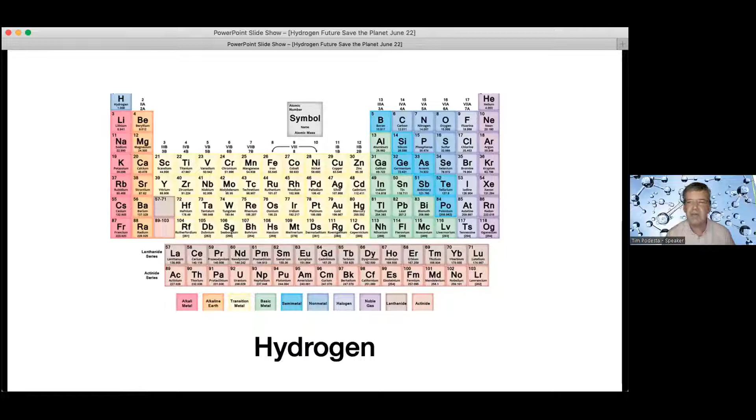Three points I want to leave you with today as things to take away. Hydrogen—it's actually all around us. It's nothing new.

Secondly, we need to get ready for hydrogen because it's coming. We're seeing many pilots of this application or that application, and as a replacement for hydrocarbons, it is certainly a useful tool. When you burn hydrogen or use it in a fuel cell, you produce water, so the carbon dioxide from hydrocarbons is abated, is avoided.

And thirdly, like gas—natural gas or LPG, liquid petroleum gas that we might put in some cars or use for cooking—we just need to take care with it. It can be hazardous, so just like gas, LPG, you need to take care with it.

Hydrogen is all around us. The sun is 70% hydrogen. Most of the rest is helium, and the fusion, the sunlight that we enjoy, the main source of energy for much that happens on the earth, is from the fusion of hydrogen.

Organic compounds—hydrogen is a big part of plants, of humans. I think 10% of the human body is effectively hydrogen, probably as water.

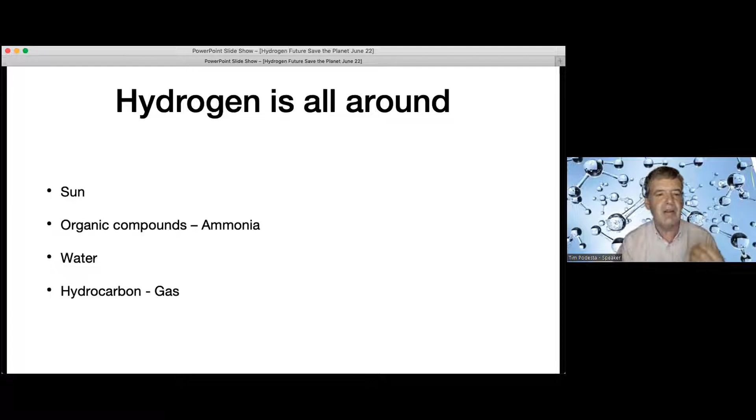The thing about hydrogen—it's very, very reactive, and actually it doesn't naturally occur on its own. It's always attached to nitrogen in the case of ammonia, or oxygen in the case of water, or carbon in the case of hydrocarbon. So to actually have hydrogen to be able to use, there needs to be a process behind it.

A bit more physics on hydrogen. Some people think hydrogen is the new oil. Now, I'm not so sure about that, because if you look at hydrogen and its properties, it's actually not dissimilar to gas, to methane. Compared to methanol and gasoline, which are the more common liquid fuels today, it is quite different in terms of molecular weight.

Some interesting characteristics of hydrogen: its actual density is very, very low—much less dense than even methane. That is an issue if you're looking to use it as a fuel, because to move it or store it, you need to compress it even more than normal gas, normal methane.

One advantage it has is viscosity. Viscosity is useful for products because that's the friction if you're moving products through a pipeline, something I'm very familiar with from my background. But because it's a lot less viscous—10 to the -5 rather than 10 to the -4 for methane—it's actually more easily transportable through pipelines. One of the issues with any fuel is moving it from its source to its consumer.

Boiling point, it's not dissimilar to another difference with methane. Methane has a boiling point of -162. So if you want to liquefy methane, you have to go quite cold. But for hydrogen, you have to go even colder. So if you're transporting hydrogen, you need to liquefy it to even colder temperatures, which can be more costly.

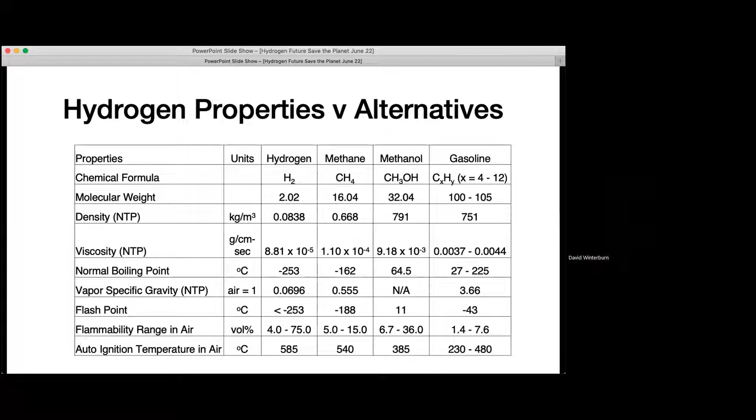If you look at the world of gas today, liquefied natural gas - a big part of the market is transporting LNG around the world in tankers. We're hearing a lot about that at the minute in terms of the global supply of gas, and one of the drivers is the scarcity or the need for LNG to replace gas from other places like Russia.

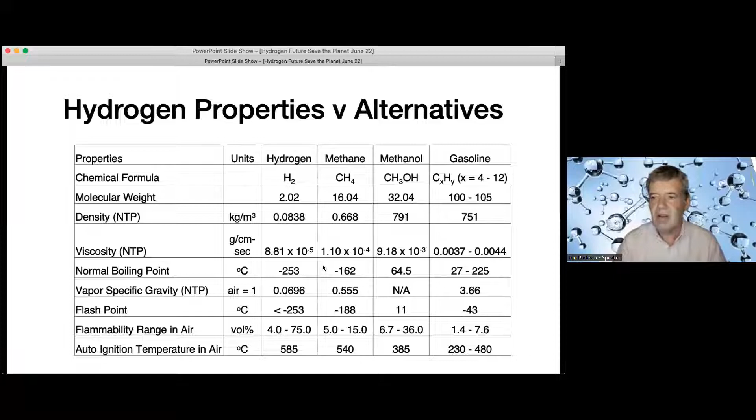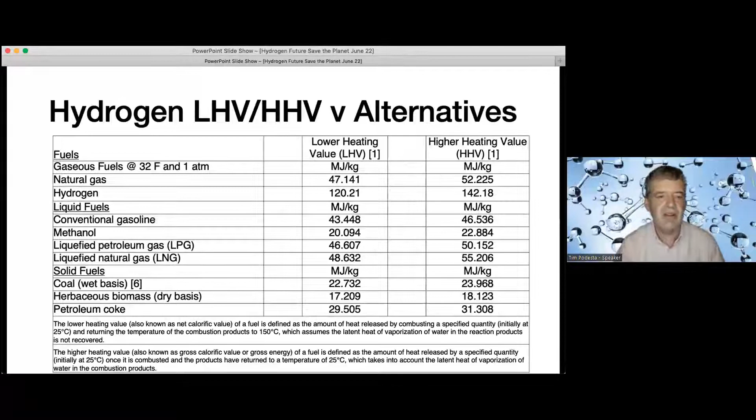So getting ready for hydrogen - this is how it will impact our lives going forward. It's the opportunity that could be part of our supply in the homes. Ultimately, you could have all our gas appliances running off hydrogen. In fact, there are some trials going on about how that might come about.

I want to give you a little background on the UK strategy for hydrogen, which I've done some deep analysis on. The UK has a strategy for developing hydrogen, and also fuel cells, which is the device that will effectively use hydrogen in various applications, particularly transportation, to convert hydrogen to electricity to provide motive power. That's something well advanced, and there are examples of it in practice, which I'll share.

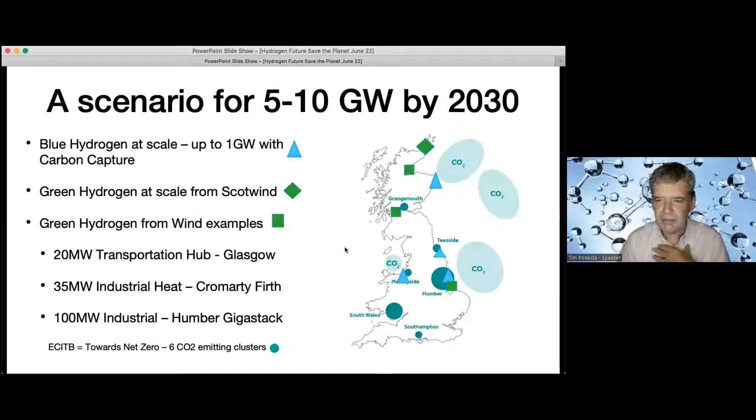So I think I want to move quickly on to talking about cars, and then leave some time for discussion.

In terms of large-scale hydrogen, one of my favorite projects is Shetland, where I did my early engineering training at a place called Sullom Voe. They've got a scheme there to effectively capture electricity or hydrogen, either making hydrogen onshore or even offshore, and finding a way of getting it to a market, probably an export market.

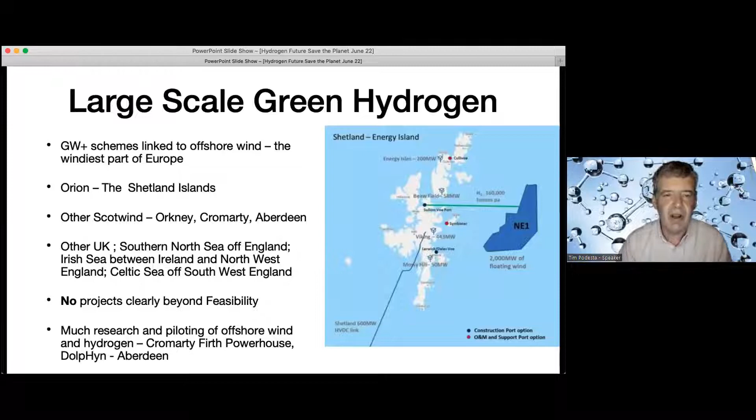Issue with wind power is two things: one is the load factor, and the other is curtailment. There are big wind farms, one of the biggest in Scotland, and as more wind power is put in place, there'll be more curtailment. Curtailment is the act of telling a producer of wind power to stop, because we can't use all the power you're producing. You need to shut it down a bit.

In 2018, I think several tens of millions of pounds were paid to the producer of electricity at this location to stop, to reduce their production of wind power. There's clearly an opportunity to use that power to produce hydrogen, and there is a scheme to produce hydrogen for buses in Glasgow.

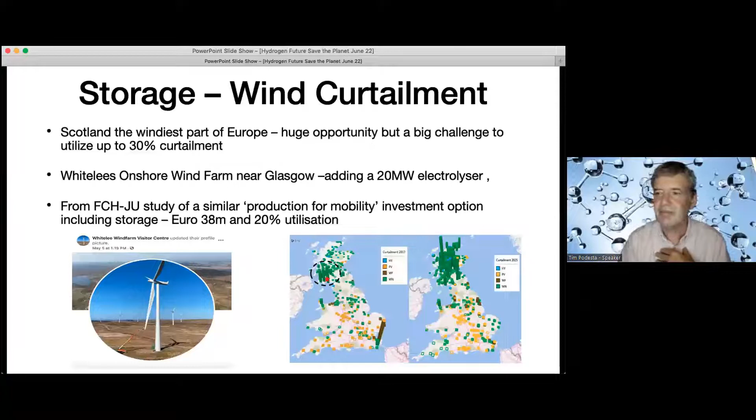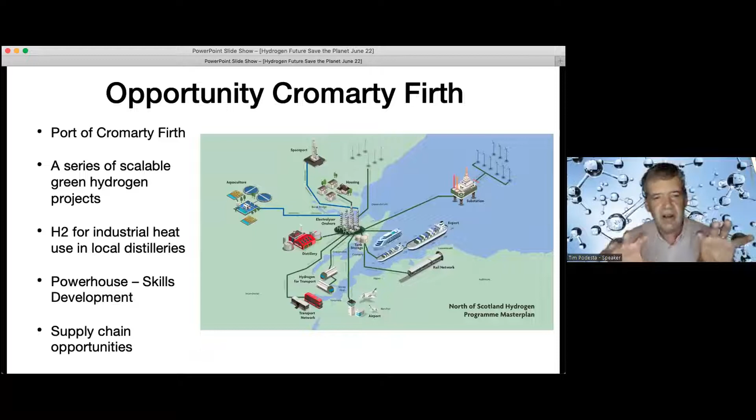Cromarty Firth, as well as this distillery scheme, have a grand plan to develop skills and an industry supporting offshore wind. So there's a strong connection between offshore wind and hydrogen, which will be a big part of the Scottish economy going forward.

Fuel cells - this is where hydrogen becomes useful for transportation. This gentleman is Tom Bacon, who was an engineer in the 50s at Cambridge University, where I studied engineering. Behind him is a fuel cell he developed, which was then licensed by Pratt & Whitney, who applied it to the Apollo program.

Effectively, a fuel cell is the reverse of an electrolyzer - you mix hydrogen and oxygen together and you get electricity and water. This was very useful for astronauts going to the moon, since they had hydrogen as fuel and oxygen as part of the payload. In the fuel cells, they generated electricity for life support, but they also produced water, and an element of air conditioning, because some heat is emitted as part of the process.

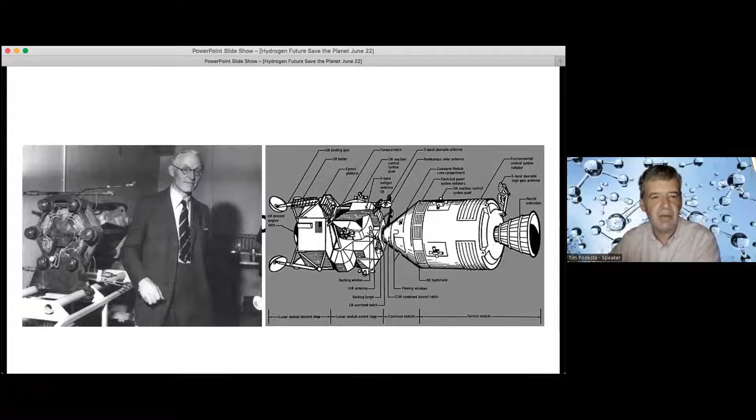What that means is that it's not new, but its application is quite new in these different areas, from buses to trucks to trains to planes and automobiles, question mark. Hydrogen has an advantage for heavy duty use - long distances, long duty time. You want your transport vehicle to be operating most of the day, day after day, and if you've got a heavy load, you need the ability to generate power.

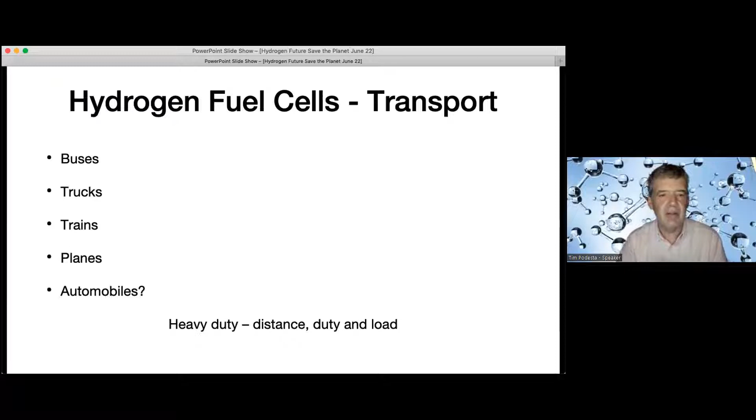Buses is one good example. At Glasgow's COP26, there was a lot of interest in projects around Glasgow going green. Glasgow's bus fleet is about 800 buses, and they have an aim to develop at least 100 hydrogen buses, 50 initially, to cover the route from Edinburgh to Glasgow. That's a long distance route, with buses running most of the day.

The rule of thumb is that one hydrogen bus is equivalent to a diesel bus, but if you have an electric bus, you need two electric buses to do the same duty as a diesel bus, because of issues of load and duration - they need to recharge.

I did get to visit a bus filling station in Barcelona. These things do exist, and I think it's a sign of how hydrogen business opportunities are developing. A lot of money has been put into developing this fueling station by an organization called Iberdrola, who actually own Scottish Power - so they are a big organization. It's organizations with that financial strength and reputational ambition that are making these investments, and this is not a cheap site - some of the facilities are actually quite impressive in terms of engineering design.

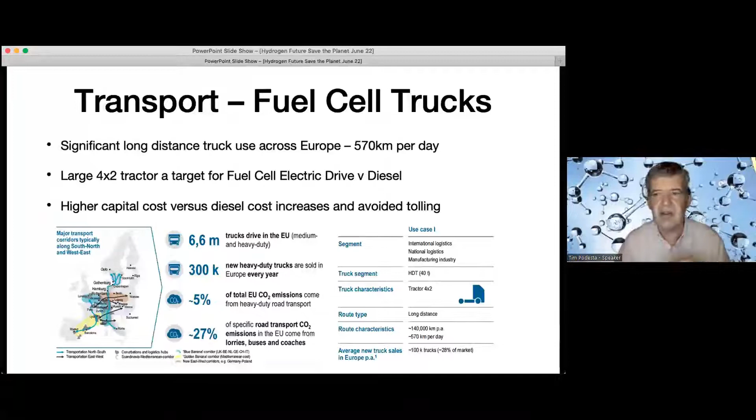Fuel cell trucks are coming as well. They definitely have a role to play in long distances, and this is a study I've looked at in some detail which supports that fact.

I've actually been driving an I-Pace for the last 2 months, and I worked out I reckon it costs me about £5 if I pay 28p a kilowatt hour for my electricity. Clearly cheaper if you can use an off-peak rate. And then the fuel, I think it's probably more like 15 or 16 pounds now, but clearly it's much cheaper to use electricity as it stands today. Remembering that fuel cost includes a lot of fuel duty and VAT, about half of it.

When we look at hydrogen then, we're looking at a car with a fuel cell. This is the Mirai, which is a Toyota, one of the cars people talk about quite a lot in terms of hydrogen. It's been around for a little bit of time. It has a range of 400 miles and 142 litres of fuel capacity, which is about 5 to 10 kilograms of hydrogen. And the cost is...

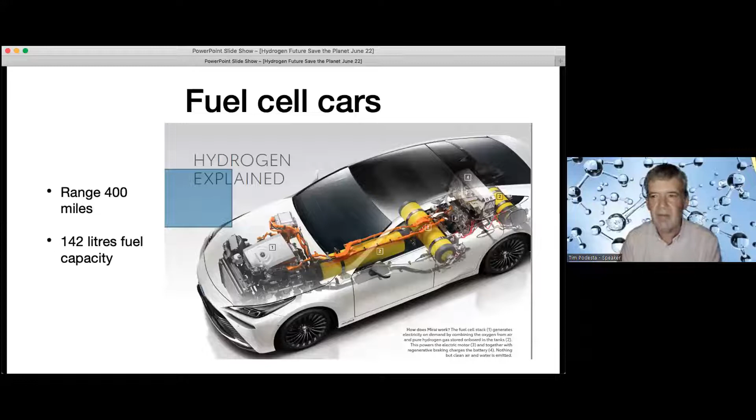This is a nice comparison in terms of where we are today. If you wanted to get a fuel cell car, you'd probably be paying twice as much, but you would probably enjoy some good fuel economy, as well as not producing any CO2.

Clearly, an issue with hydrogen is, like with electricity, where you can refuel. Now, hydrogen, if you can get to a refueling point, you can probably refill your tank up quite quickly, almost as quickly as a diesel or petrol, but then you'd have to - the issue then is where there are fueling stations, and that's why what I'm seeing is hydrogen transportation hubs are popping up near where hydrogen is produced.

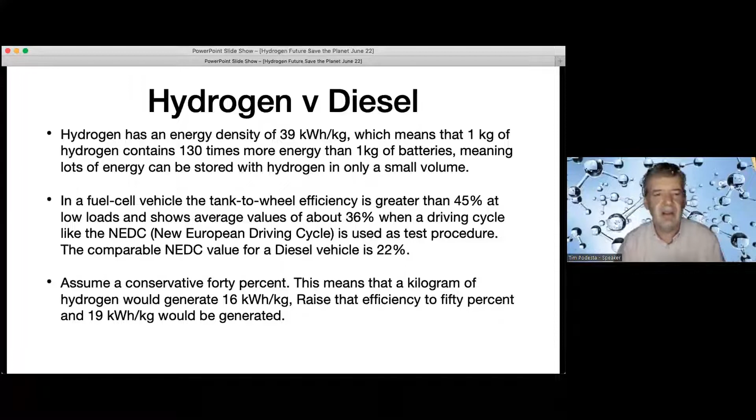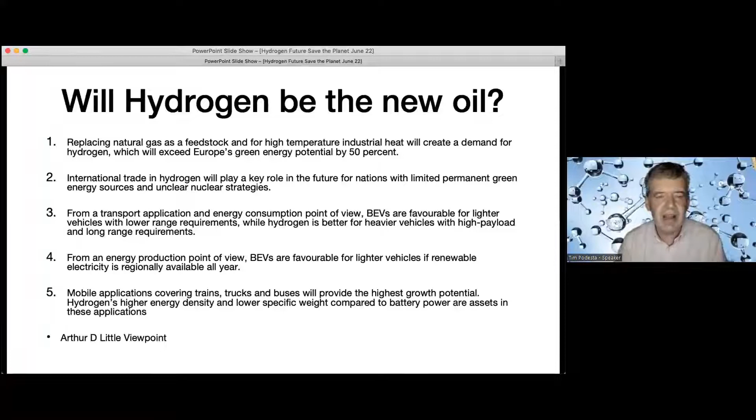But with a focus on hydrogen, I think in one sense it's the new gas. Although that 10 gigawatts of gas I showed you earlier as the ambition for 2030 is only 10% of UK's current gas consumption. So it'll certainly address key parts of the area, but alongside electricity, hydrogen, for me, is certainly not new oil, but it's certainly a useful replacement for gas going forward.

So hydrogen's all around us. I hope I've given you some examples of what it means to be getting hydrogen ready. But if you like gas or LPG, please take care.